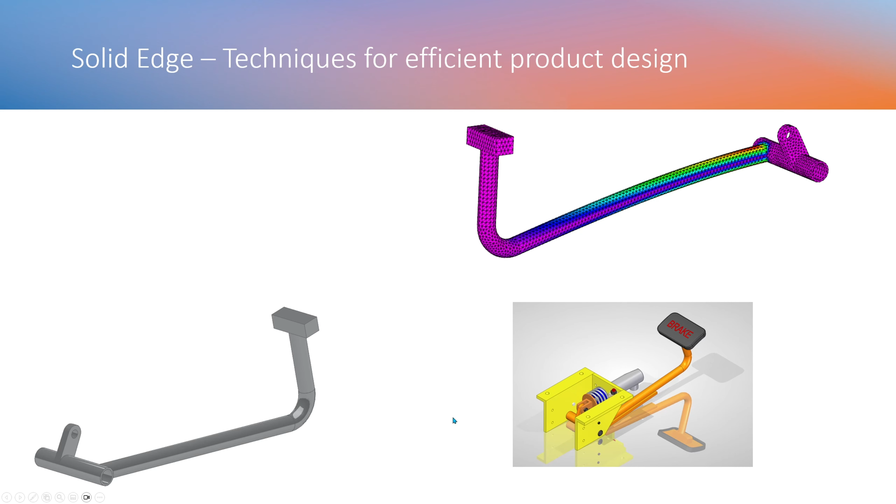So here, what we are going to do is we are going to design a brake pedal within the existing assembly. Then we are going to ensure the fit around all the existing components in the assembly, and then we are going to ensure that the component that we made has all the assembly relationships, and then we are going to test the existing pedal to make sure it has sufficient strength.

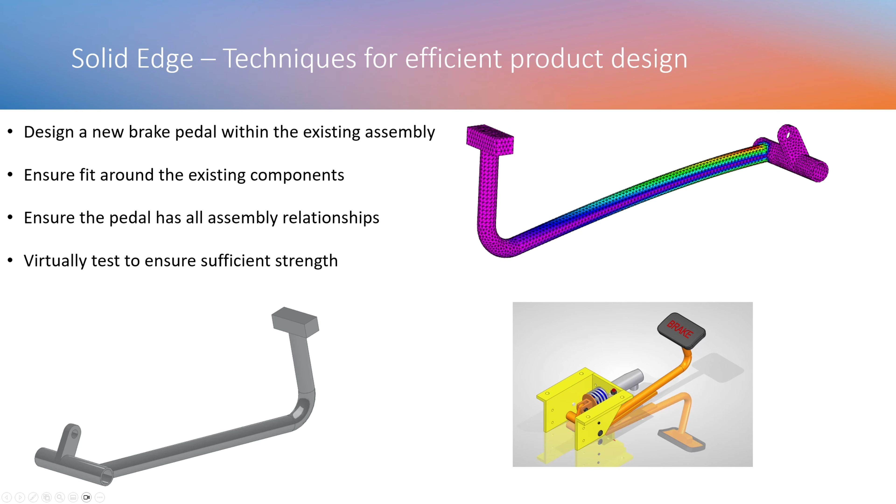So here we have a brake pedal assembly, and we'll see how we can create the pedal part inside the assembly itself using the create part in place option. So inside Solid Edge you have the option to create part in place directly, where you can place a coordinate system and decide if you want to edit the part right in the assembly.

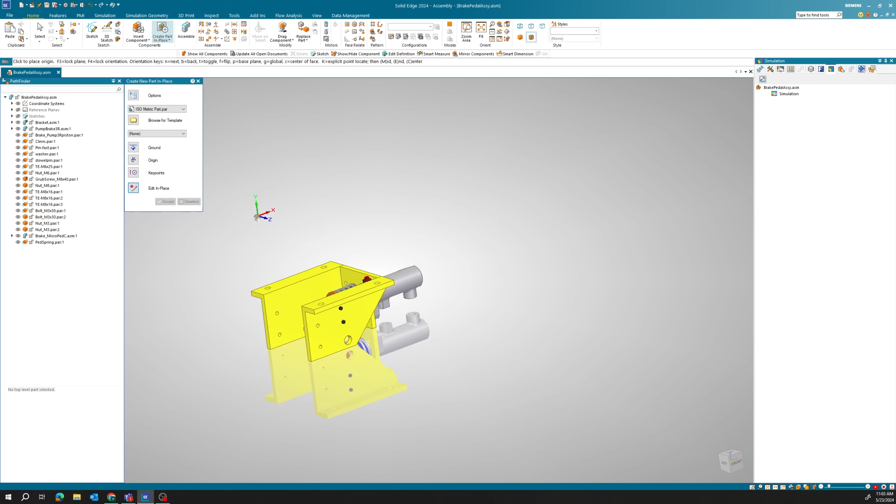So once you make the selection for those options, the software will give you the option to place your origin, and then you can decide what standards you want. So I'm going to use an ISO metric part file, but you also have options for sheet metal, assembly and weldments. You have the option to ground the component, and this one is to make sure that you are going to edit the part in place.

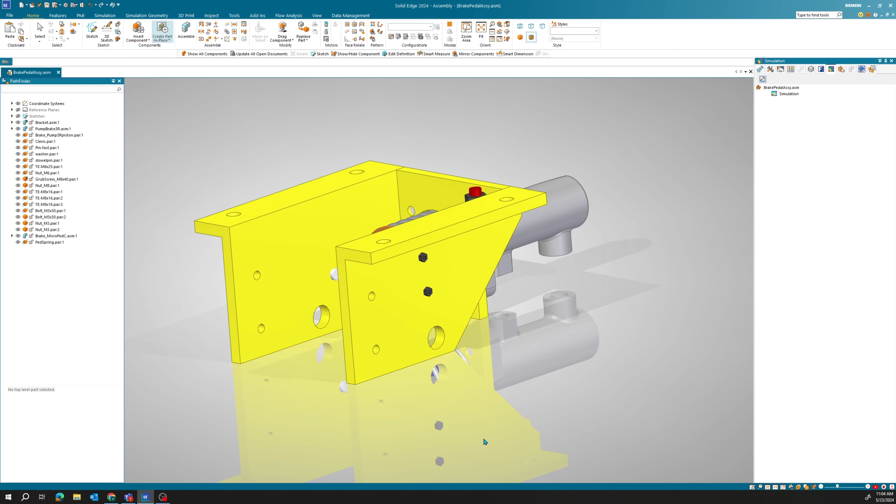Once you hit accept, the software will ask you to save the part. So I'll just give it a name, pedal 5, and this puts you right into the part environment, as you can see.

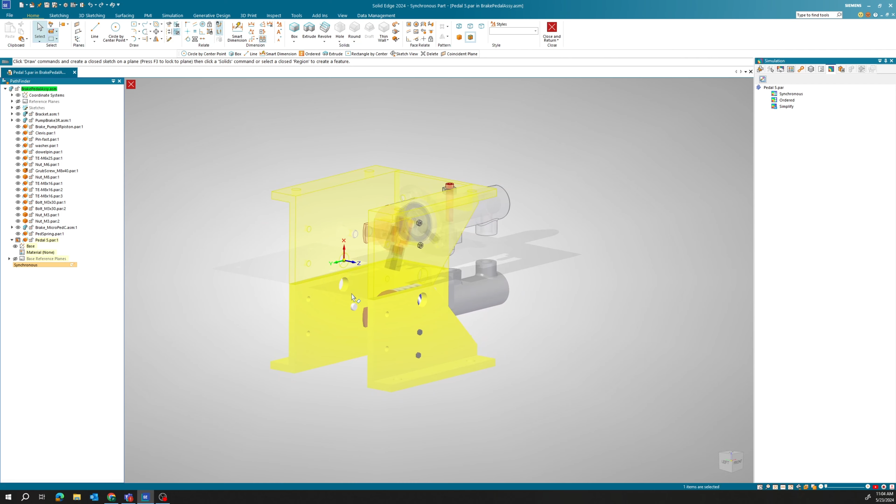So even though I have selected edit part in place, you'll see that my assembly is hidden, which will normally happen. So you can turn the assembly back on using the option that is called hide previous level, and the shortcut for that is Control plus Q. So here you'll see the assembly in shaded. Now what I can do is I can use this existing coordinate system and start my first sketch.

So here I would like to make two concentric circles and give them the dimension. So the first one I'm going to give a dimension, let's say 21 mm, and the second one I'm going to give it a dimension of 17 mm.

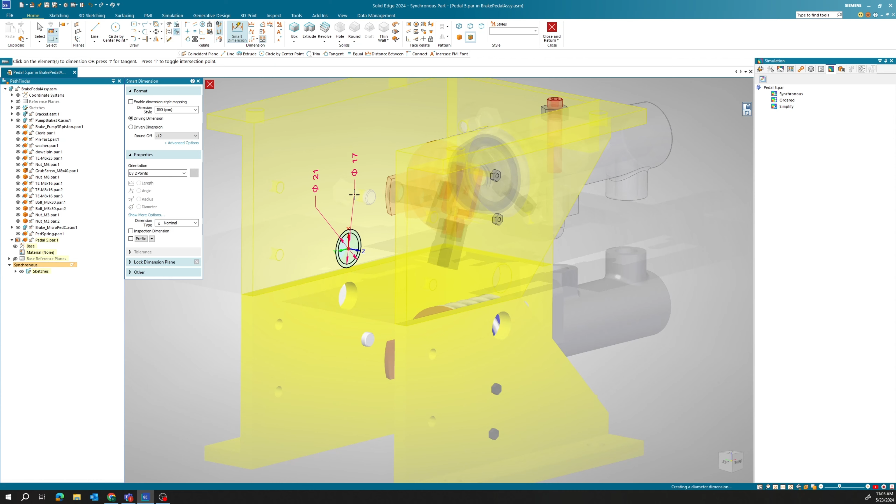Now since we are doing this in synchronous, the user can quickly select the region itself and extrude it out. Now when you're extruding out, you don't have to specify the distance, because since you're in the assembly environment, you can use the existing edges and endpoints as a reference to make the solid. So here you can see quite easily I have made my first solid.

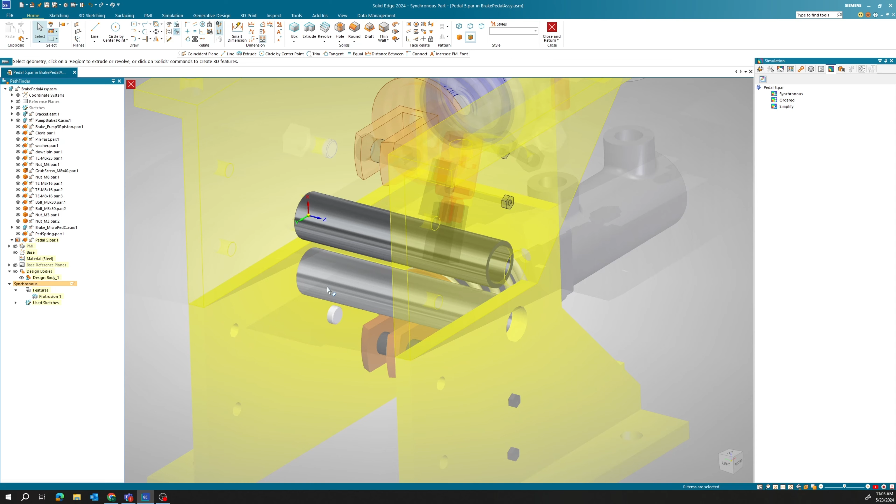Something that I did not discuss is that you can also assign material for the part. So you can quickly go to the material table here and select the desired material. So here I plan to use steel for my pedal part.

Next is where I'm going to attach a pivot here. So to do that, I would need a plane on which I need to make a sketch. So since we are in synchronous, we can simply select any face, and then using the steering wheel, I can decide exactly where I want to place that plane. So let's say I want to place this plane at a distance of 33 mm

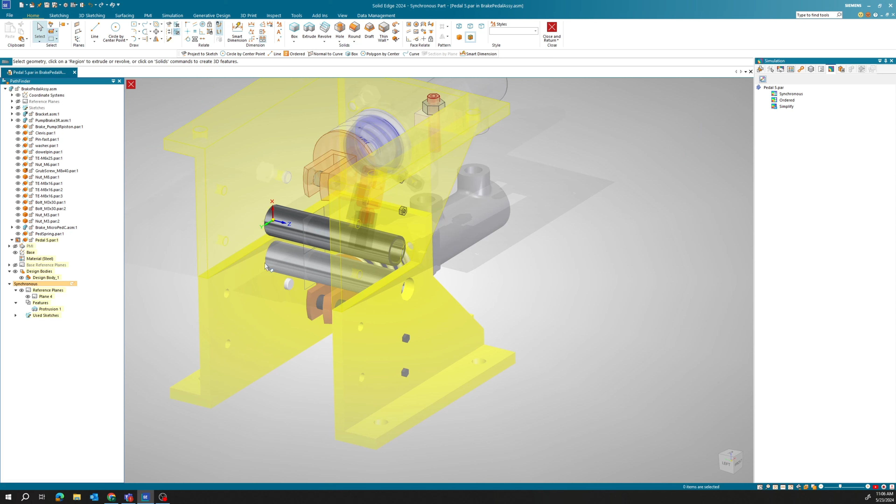from the base reference plane for this part, and then I don't have to use this part, because now if I want to make a sketch here, you'll see that I'm not able to select anything right here. So for reference, I'm not able to select anything here, as you can see.

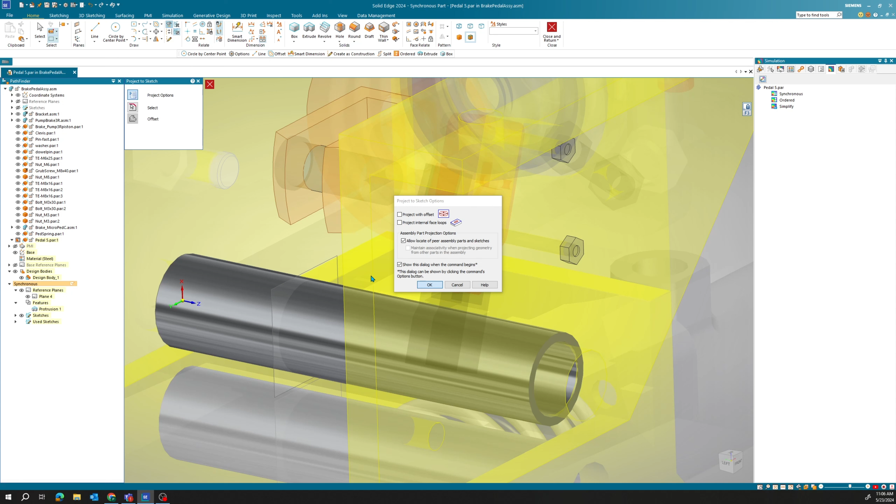But to make a sketch, we have a command that is called project to sketch, and use the existing edges to make the sketch. So here I want to select this circle right here for reference, and this circle right here for reference. So this quickly creates these two circles as a start point, and using these sketches the user can very easily make the other sketches too.

Now I can place a dimension here. Let's give this a dimension of 20 mm, and to make that pivot I would like to place two tangent lines from this circle right here to this circle right here. Same I would like to do here as well. Place a tangent line from here to here.

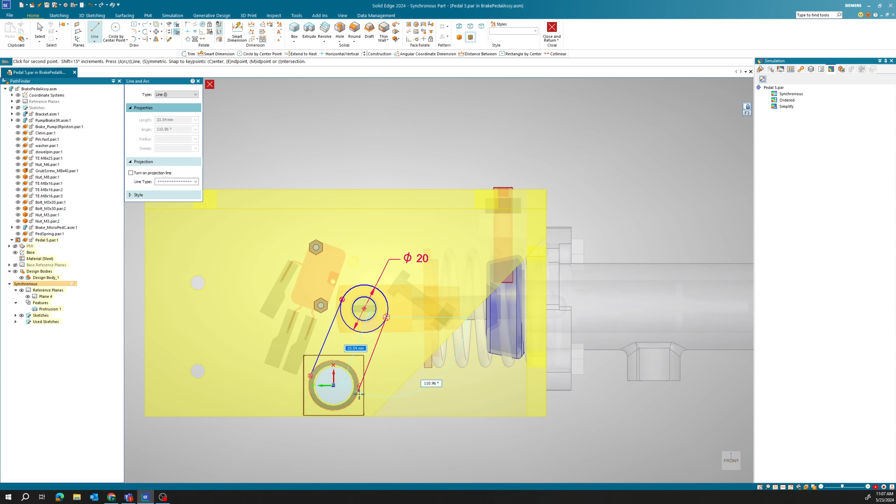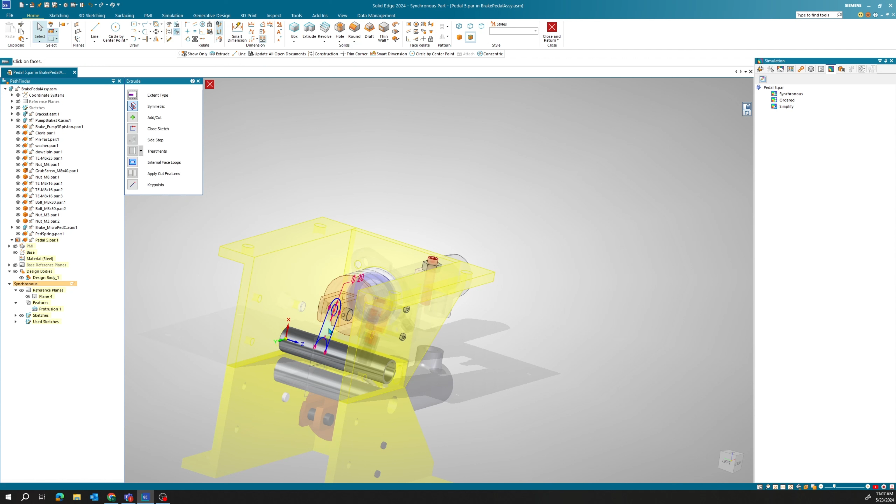And now to make it a complete solid, I'll be using a trim command and trim off this extension so that the software identifies that as a solid region. And like I said, since you're in synchronous, you can quickly select the region and create a solid. So here I'm going to turn on my symmetric extend so that it extends on both the sides and give it a dimension, let's say 8.

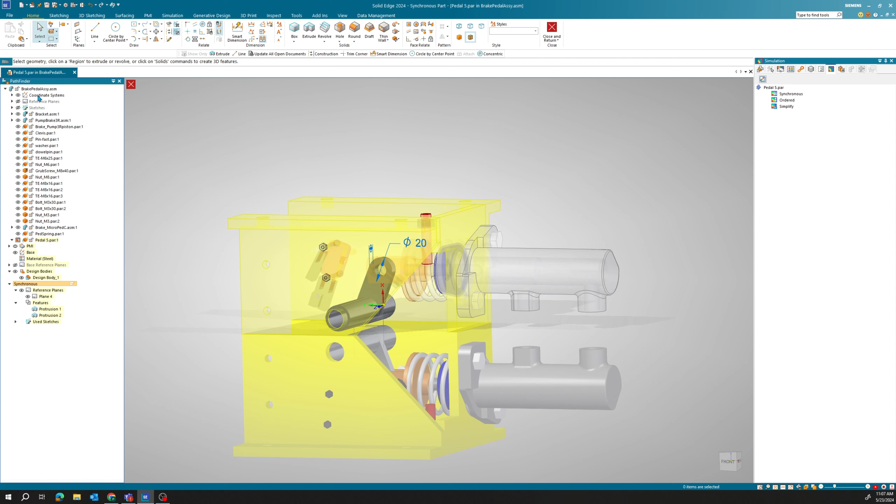So here, as you can see, if you take a look from the left view, it is placed exactly at the center as it is supposed to be. And this is how you can make a solid or a part using the assembly itself. Now to create the rest of the part, I don't need the assembly. So to make my space less cluttered, I'll just go ahead and say show only to the part so that I can focus only on the part, right? So let me hide these dimensions.

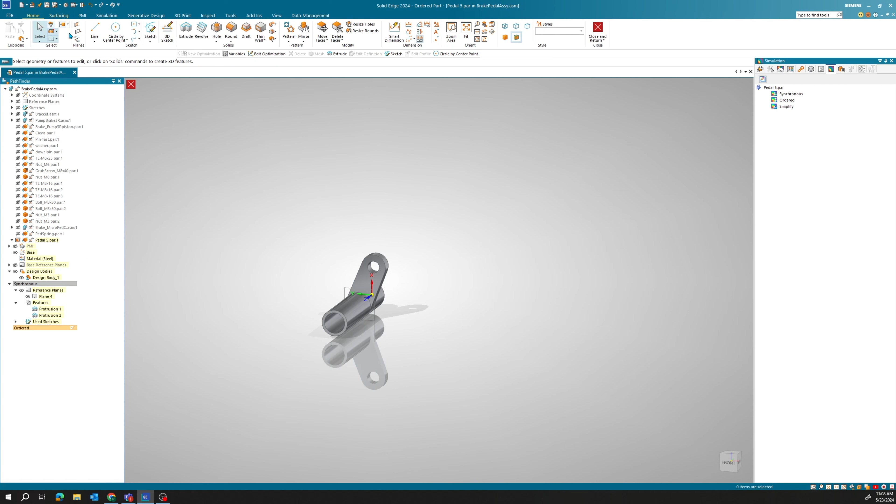And now to make the actual pedal profile, I will need one more plane. Now that we have done some modeling in synchronous, we'll now move to ordered. And in ordered, we'll create a parallel plane. Now this parallel plane will be used as a start point to create the profile of the pedal.

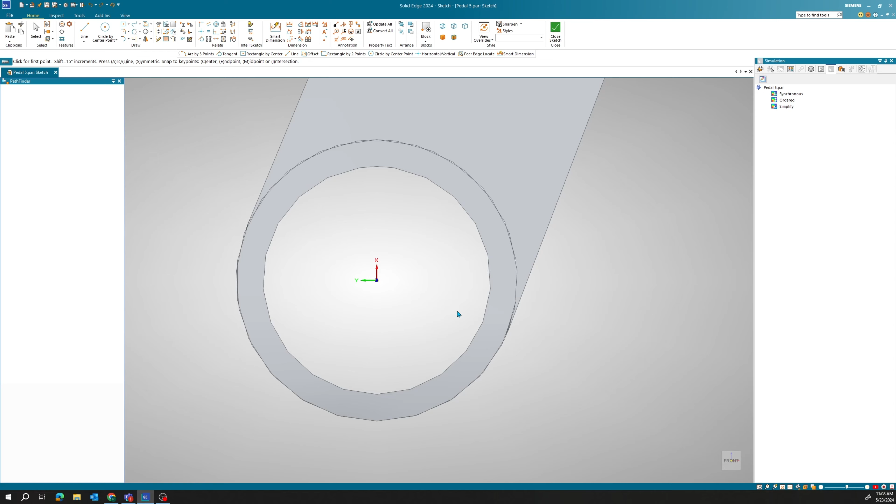So to create a profile, I'll go to line command and select the plane which I just made right now, on which I'll be making the profile. So this profile is what is going to decide how your pedal is going to be. So let's make the first straight line, make an arc here, and then another straight line.

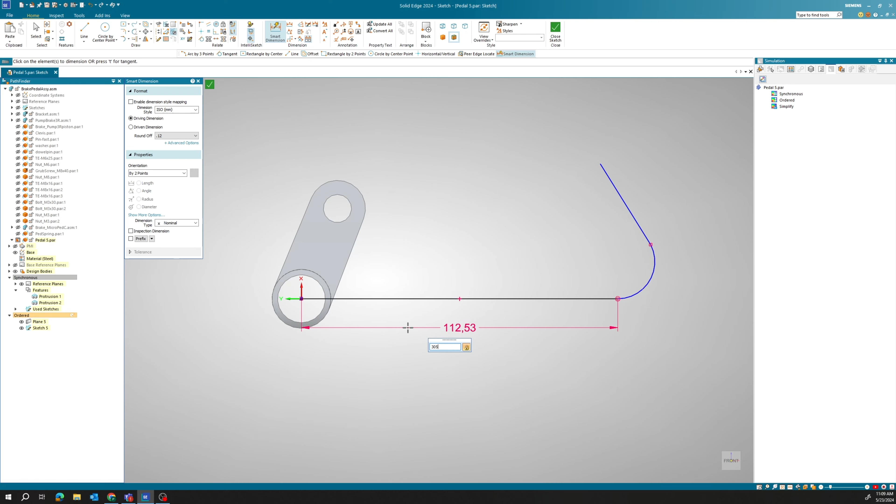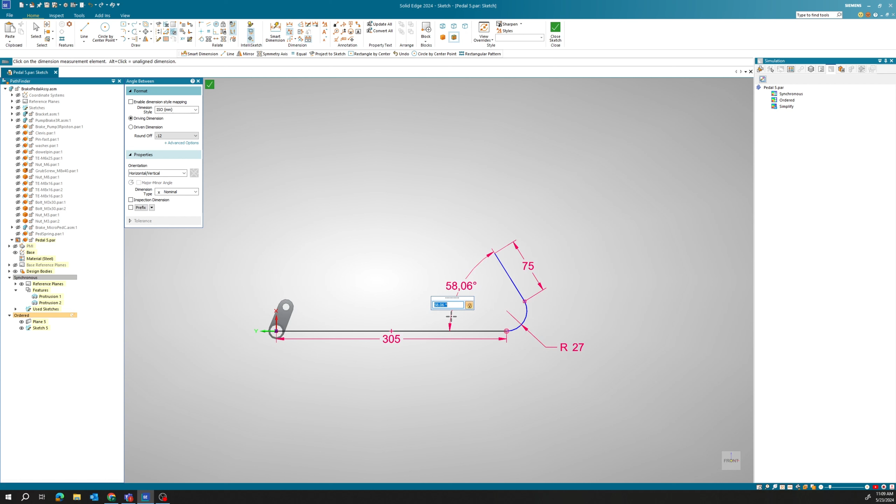So I want my pedal to look something like this, and using smart dimension, I can place all the dimensions here. So let's do 305 mm as the total length. Radius of this one is going to be 27, and this length is going to be 75. Now I also want to specify the angle between the inclined line and the straight line here, that is going to be 75 again.

Now one thing that you might have noticed is that one of my sketch is black and one is blue, which means that the blue part is not fully constrained. And the reason why it's not fully constrained is because the line here does not have any relationship with the arc. So we need to place a tangent relationship between them. And once you do that, you'll see that the line here turns black, which means it is fully constrained.

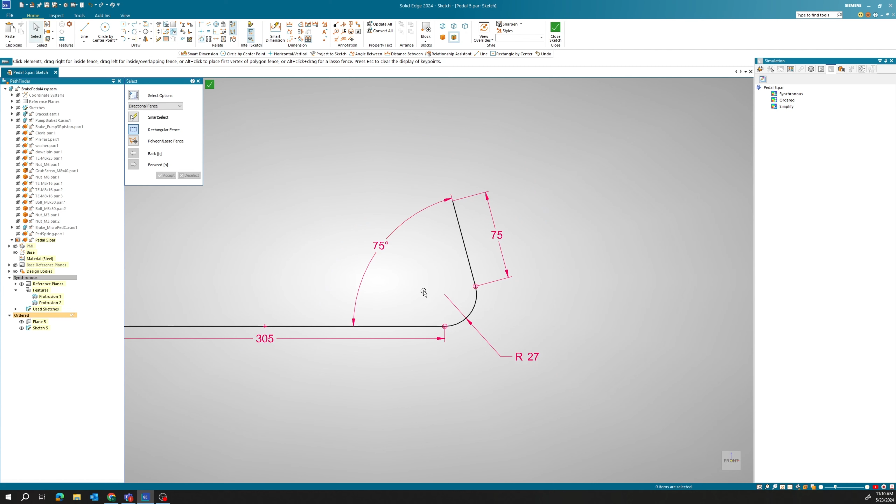So once you finish creating the profile, we need to create the cross section for the pedal too. To do that, we'll have to place a plane that is normal to this curve of the pedal. To do that, I'll go back to plane creation and select a plane that is normal to the curve. And on this plane, we plan to make a circular profile. So to make that, I can go to circle and quickly create a circular profile.

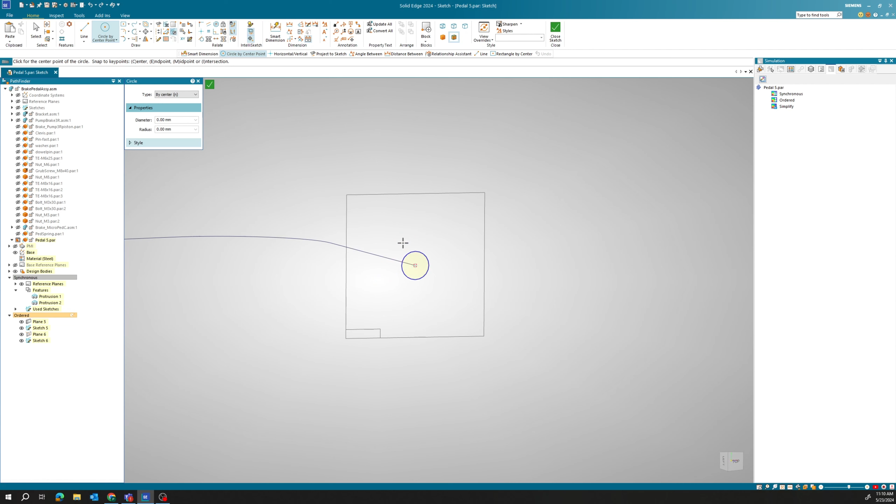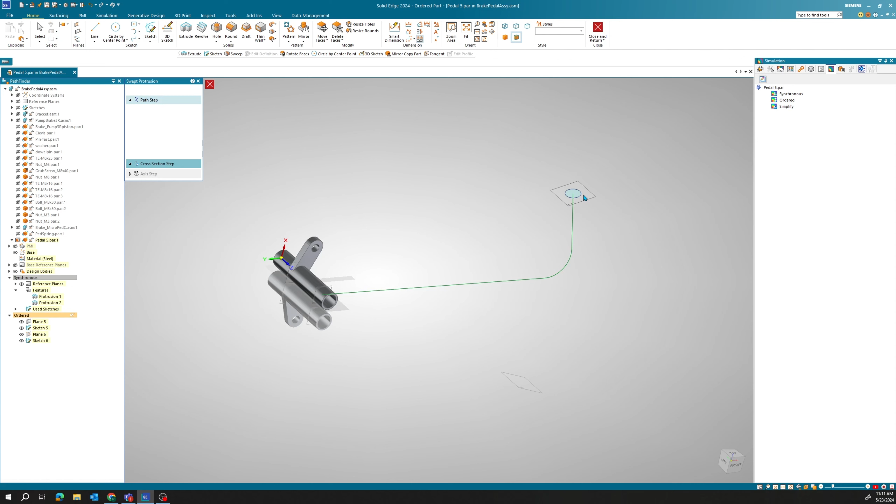So here what I'm going to do is I'll place a dimension. Let's say the diameter of the circle is going to be 18 mm. And now using the sweep command, I can sweep this cross section over this path. So we'll go to sweep command, select the path, and then the cross section. And it creates your pedal something like this.

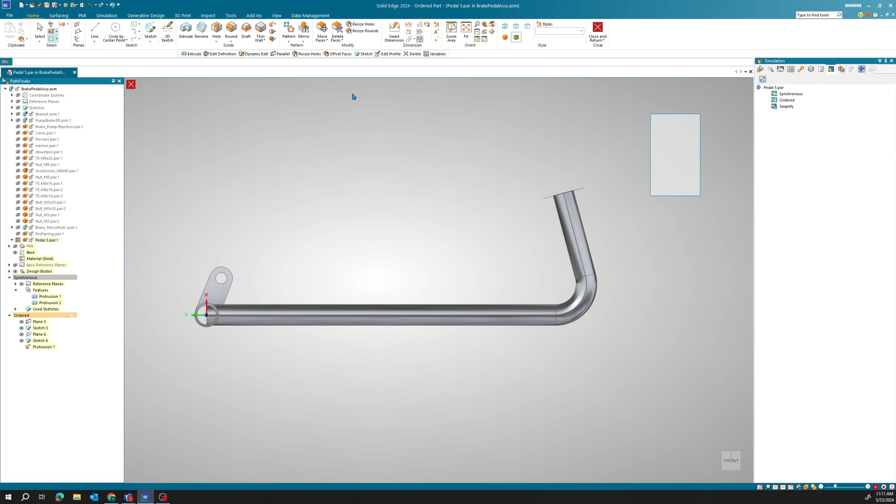Now, a really good thing about ordered, or something new that has been added in ordered, is that we have access to synchronous technology inside ordered. So some commands like move faces, offset faces, and rotate faces, we get access to synchronous environment, right? So we can quickly select the regions that we want to rotate. So here I want to rotate these regions, but accidentally I selected these faces too, so I can simply turn them off.

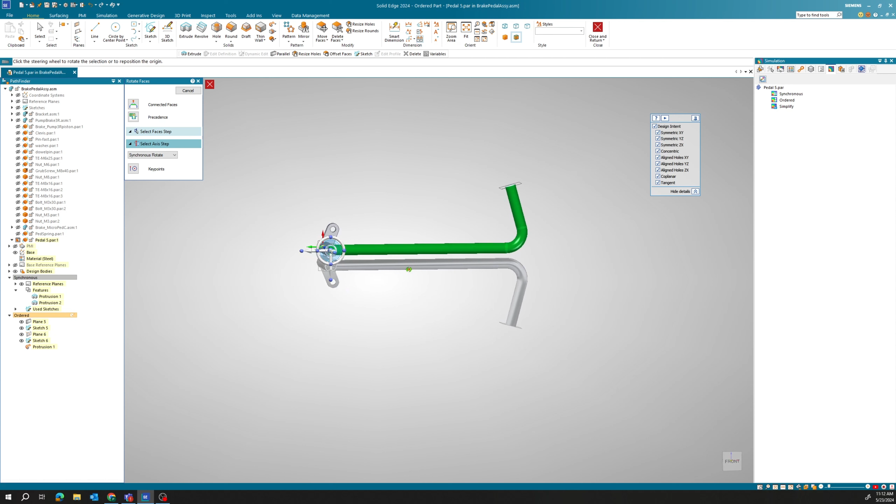And once I hit this green checkbox, you'll see that I get access to steering wheel even though I'm in ordered. So this is something new that has been introduced in the newer version of Solid Edge, so that the users can get access to both the environments at the same time. And using the steering wheel, I can change the angle here.

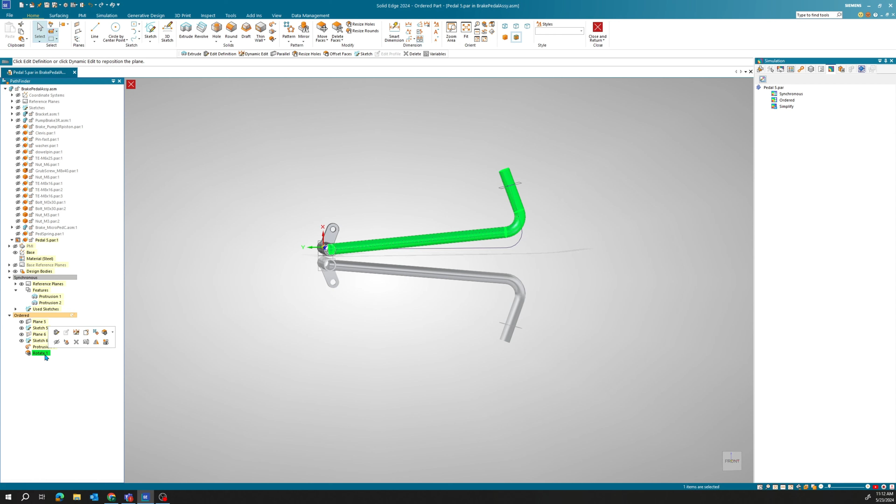So let's say I want to place the angle to 5 degrees here, so that the actual pedal can be depressed. And since we are making this change in ordered, it always creates a history here, as you can see. And if the user wants to change the angle again in the future, they can come here and change the angle, right? So once we have made that, we'll create a footrest for the pedal too, and that can be easily done using this extrude command.

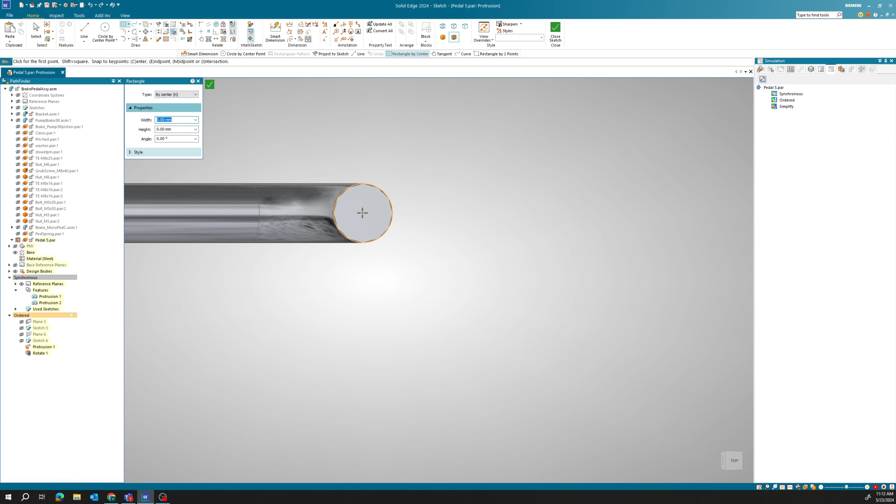So here I'm going to create a rectangle by center first, and then place a dimension. Let's do 20 by 50 here. So we'll do 20 by 50, and very quickly we'll make a solid out of it. Since we are already in the extrude command, we can make a solid right here. So something like this, we have created our pedal.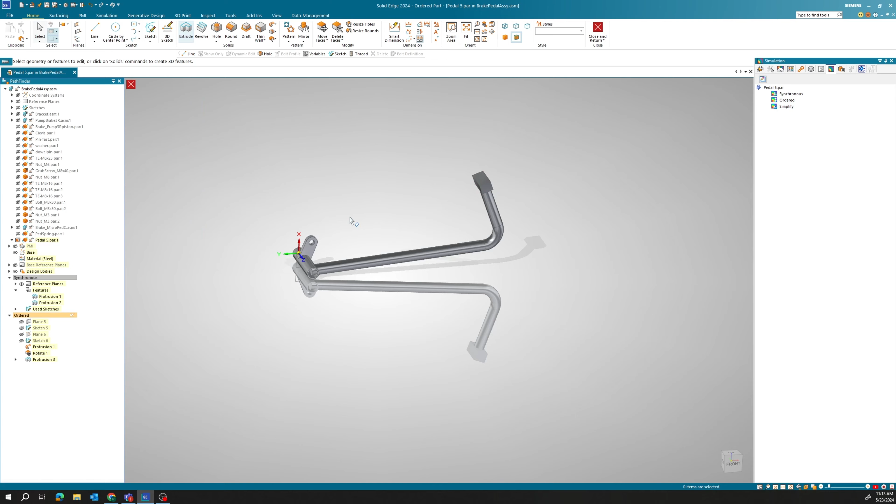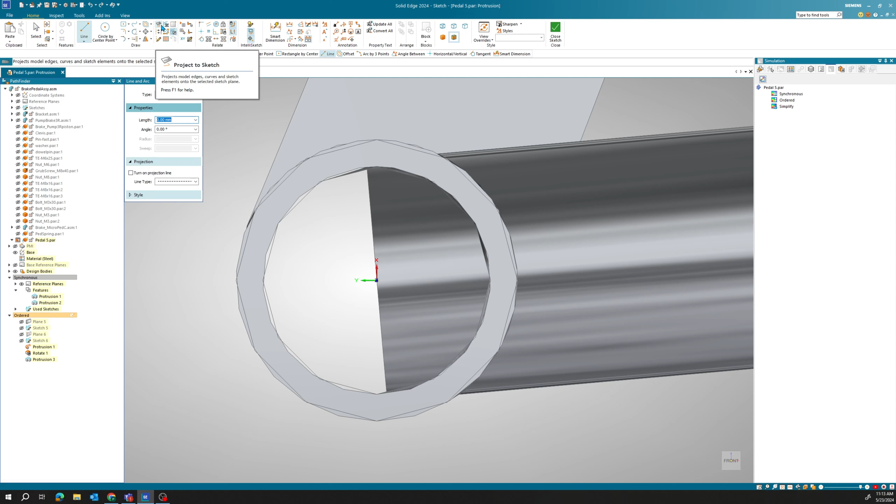There's a small defect that the pedal cross section here is intersecting with the pivot. So what we can do is we can come back to the extrude command and quickly trim this out. So to do that, I'll select this coincident plane and use the existing edge using the project to sketch command and trim off that intersection. And that way, once I trim that off, you'll get a really nice cut, as you can see here.

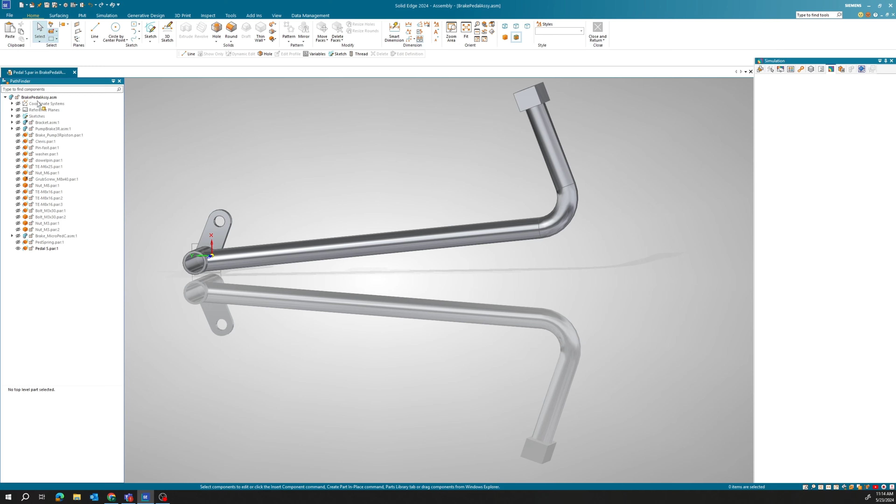So you see that within no time, I have created a pedal profile or a pedal part inside the main assembly. And if I go ahead and close this and turn on my actual assembly, it should look something like this. Now this is not a complete assembly, so we are still going to need some additional parts to be connected here. So I'll go to my parts library and bring in the required parts.

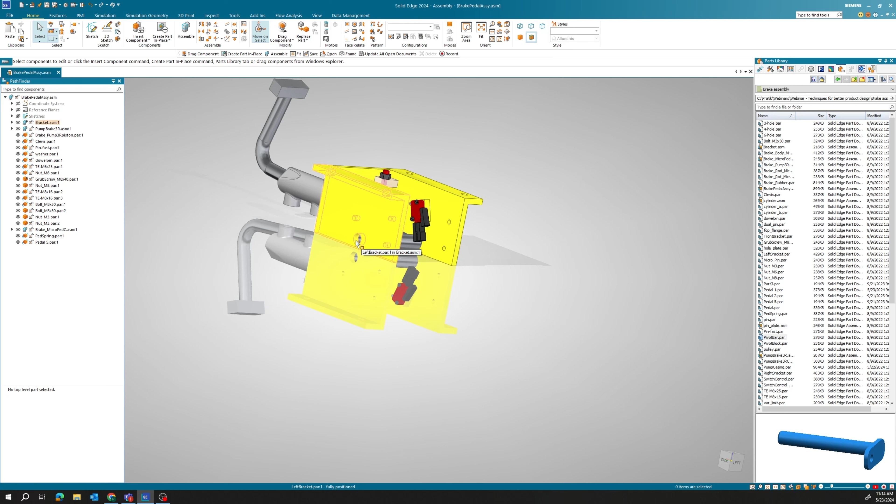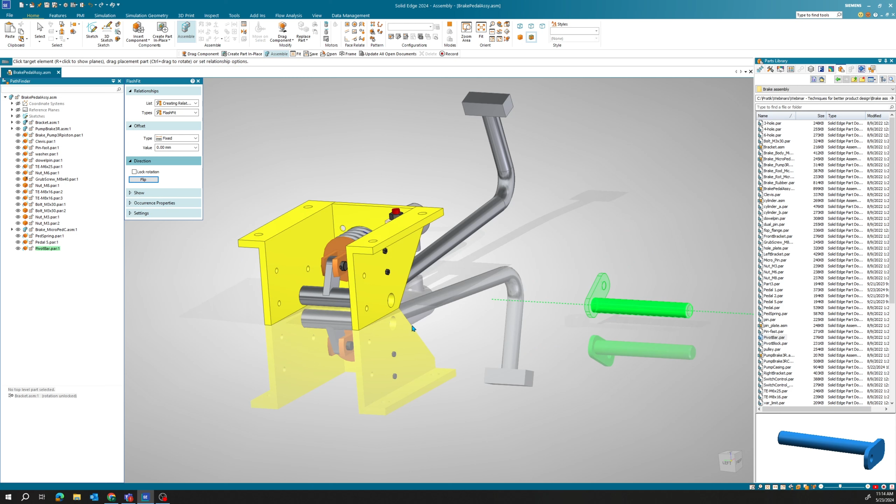So here I'm going to add a pivot here which will go inside this pedal. So let me bring the part in, and very quickly inside Solid Edge I can place all the parts. So using FlashFit, I'll just select this part right here, and it will axial align with this one. Flip the sides, we'll create one more axial align here, and then finally face mate these two faces.

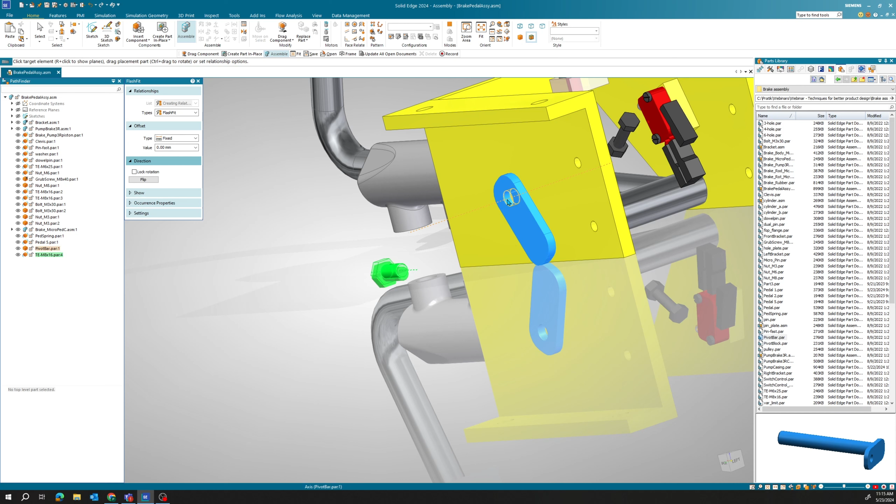Now to attach this pivot bar, we'll need an M8 bolt. So we can bring that in from the Pathfinder itself, since that bolt has already been used here. So FlashFit these two faces. This needs to be flipped, and then we'll create a face mate between this part of the bolt and this face of the pivot bar. So now everything looks good.

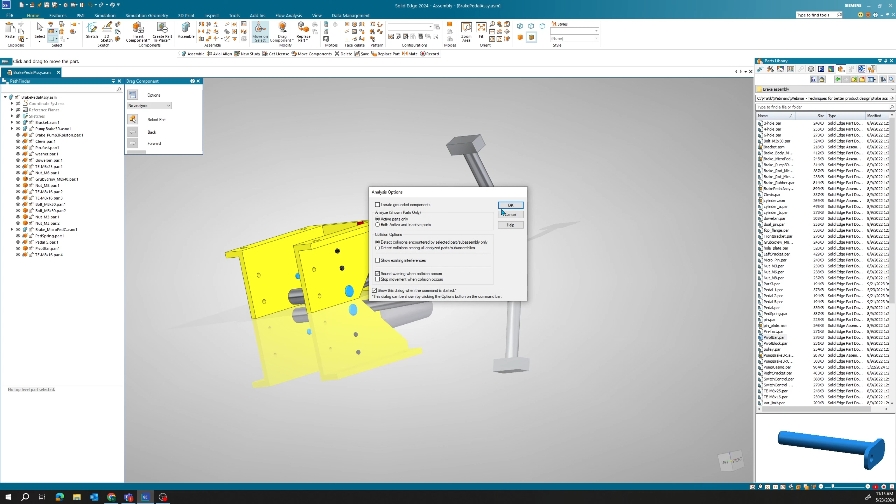Now let's try to simulate the motion of this pedal here. So to do that, we have this drag component command, using which we can just try to drag the component. So looks like not all the parts have been fully constrained. So we need to apply constraint. Even though we have designed the part itself in the assembly environment, we still need to constrain it.

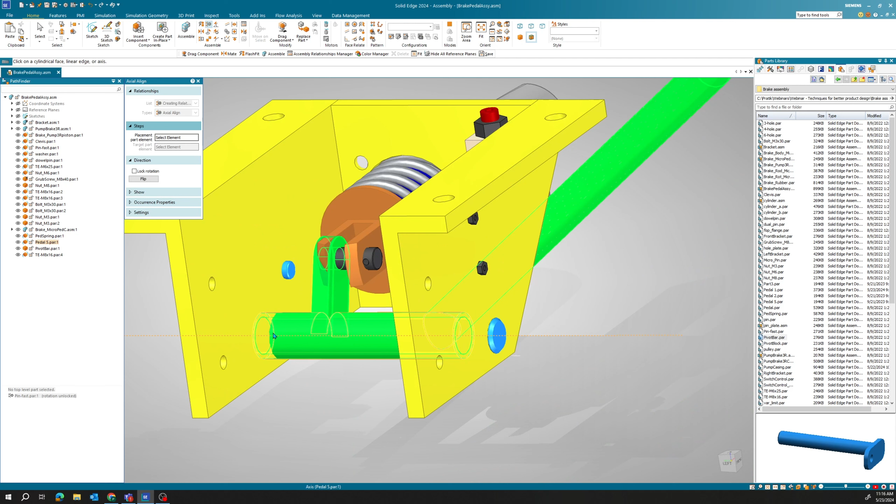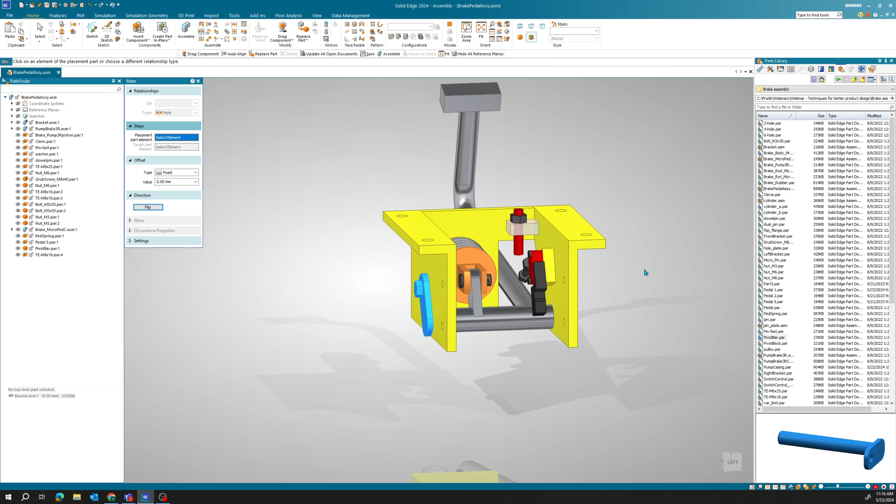To constrain the part, we can use some commands like axial align this circular cutout with this circular cross section. Then we'll need to axial align these two holes, and we need to create a face mate between this face right here and this face right here. So now the part is fully constrained, and now if we try to move the pedal, it should simulate exactly the way we want.

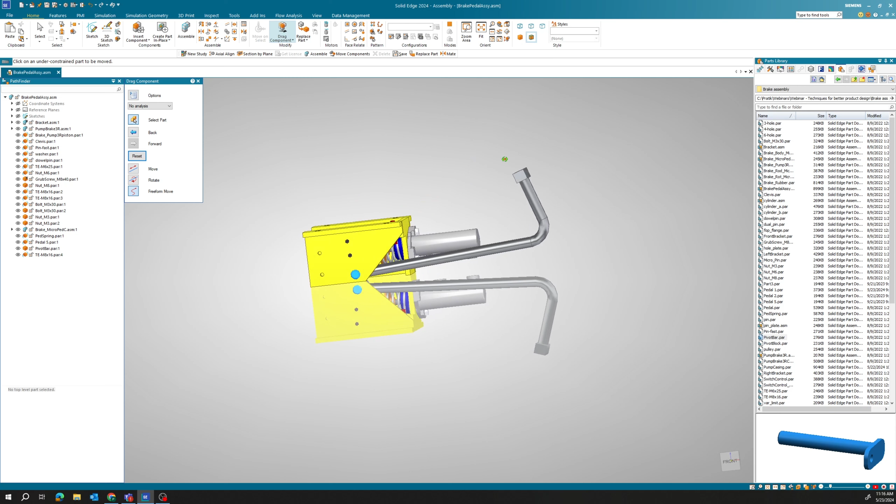And as you can see, the part is following the profile or the way we have designed it to be moving. So this is how you can create your parts quickly inside the assembly itself, which will save you a lot of time going back and forth, taking the measurements and creating the part inside a simple part environment. Now this is not the end. We still need to check for the structural integrity of the part that we have made.

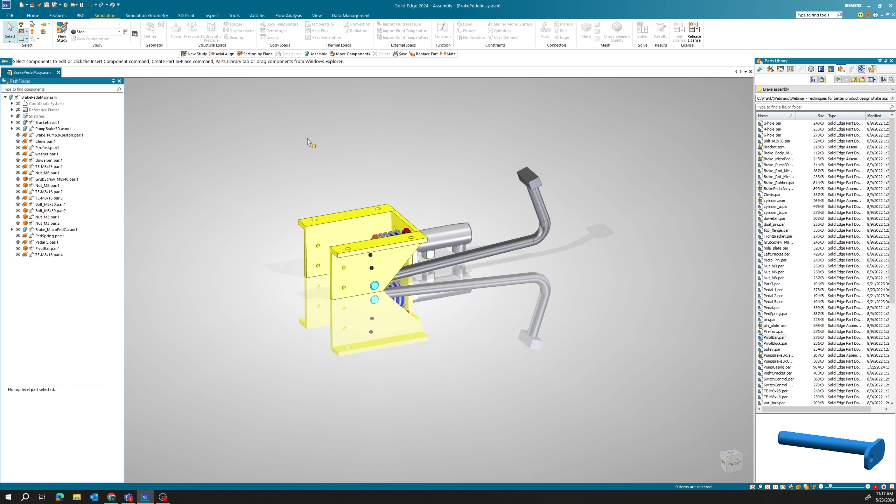Now one thing you have to remember is that Solid Edge is not just a typical design tool. We also have add-on products like simulation. So a really good thing about Solid Edge Simulation is that it is integrated right here inside the Solid Edge environment, so that you get the same look and feel inside Solid Edge. So to use that, I'm going to open this pedal part in a new window. And now I'll go to the simulation tab.

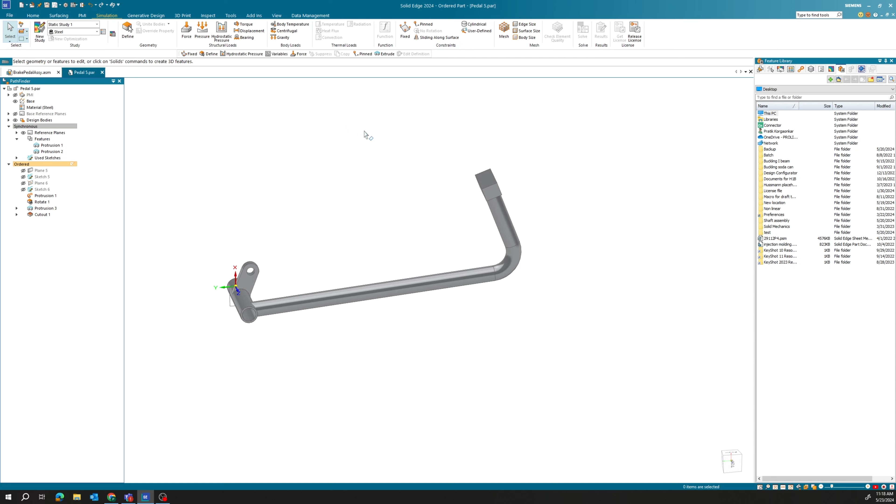Now let's start by creating a new study. We are doing a simple linear static study, and here I will be using a pin constraint for this cylindrical motion, and applying a force on this pedal right here, and the force value, let's say, 1,000 Newton.

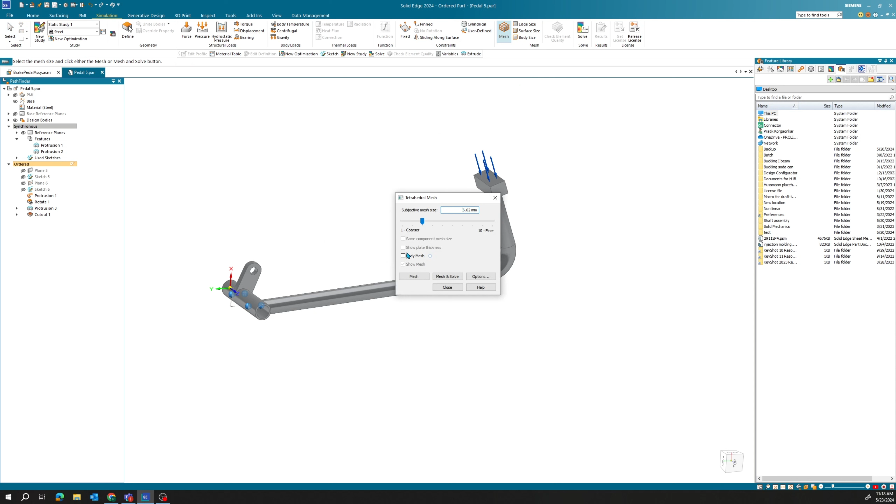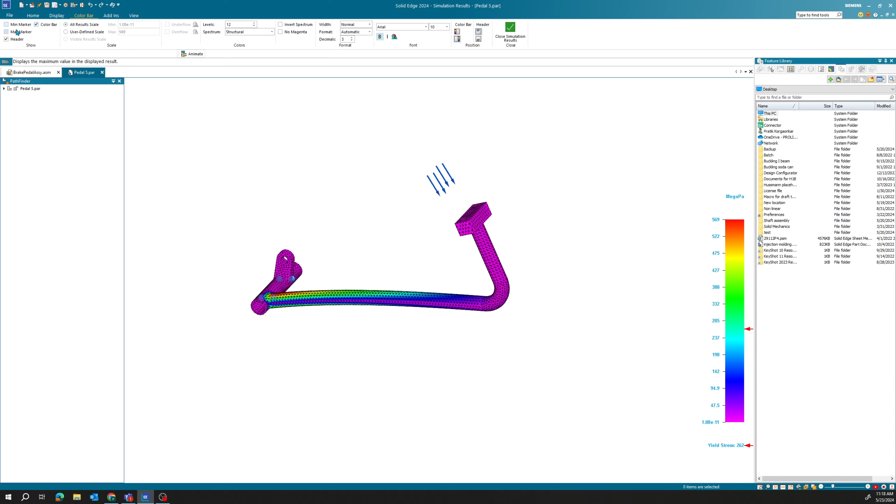Once you have specified the loads and the boundary condition, you can mesh and solve the model quickly from the mesh command itself. So once the model has been solved, you'll find out the high stress concentration areas, and then you can alter your model according to that. Now you'll see that my high stress concentration area is going to be right here. The maximum stress, as you can see, is 569 megapascal, and my yield stress is 262 megapascal.

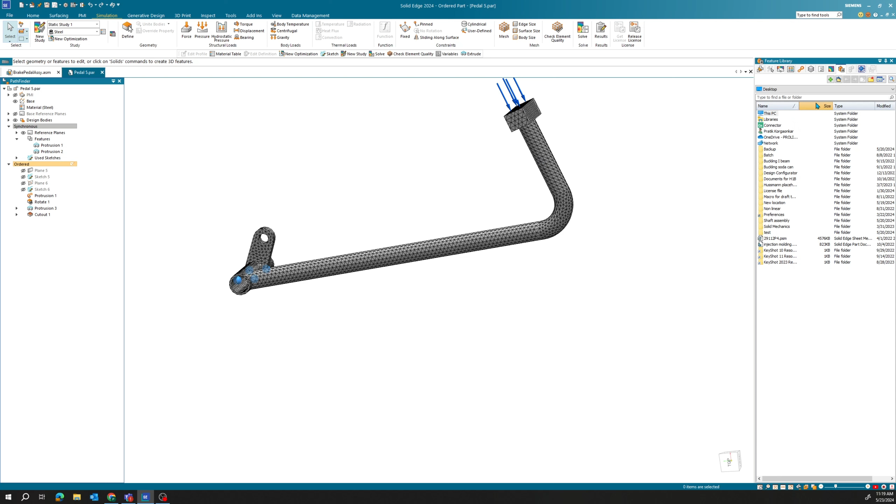So in order to reduce the stress, one thing that we can do is we can increase the diameter of this pedal profile, right? So to do that, since we are already in Solid Edge, you don't have to do a lot. Simply, just for convenience's sake, I'm going to hide all these loads, boundary conditions, and mesh that we have made. And using the sketch right here in the same environment, I can very easily make the change. So here, instead of 18, let's change that to 21.

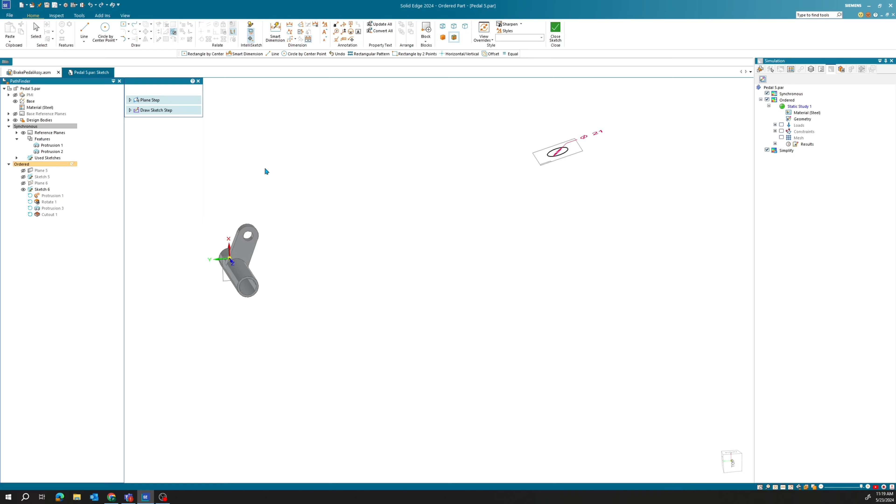And once you close the sketch, the software will update your profile for the new cross section. Now, a really good thing about this is you don't have to reapply loads and constraints. All you need to do is remesh the model. And just by hitting mesh and solve, the software is going to solve for the new cross section, and we should definitely see some reductions in the high stress concentrations.

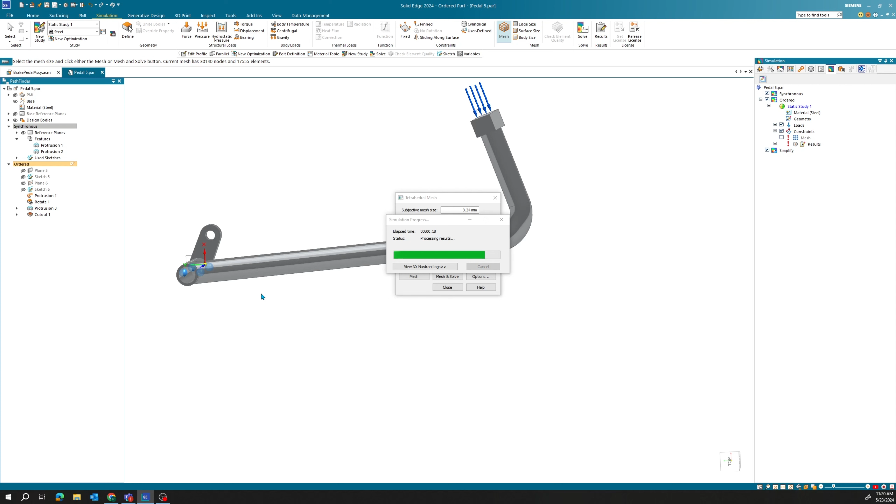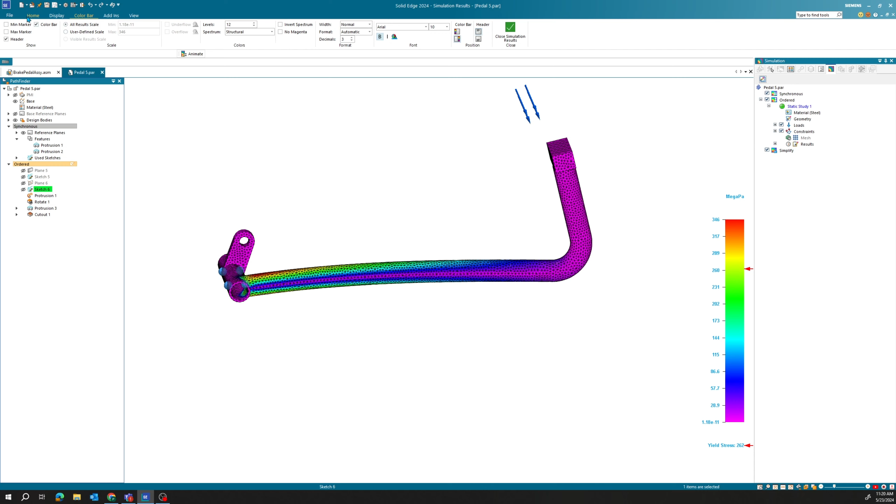Now, as you can see, our stress concentrations now have been reduced to 346 megapascal, and previously it was 569 megapascal. So this is one way of very efficiently reducing the high stress concentration areas. Also, inside Solid Edge simulation, you can animate to see how the pedal is going to behave when actually depressed.

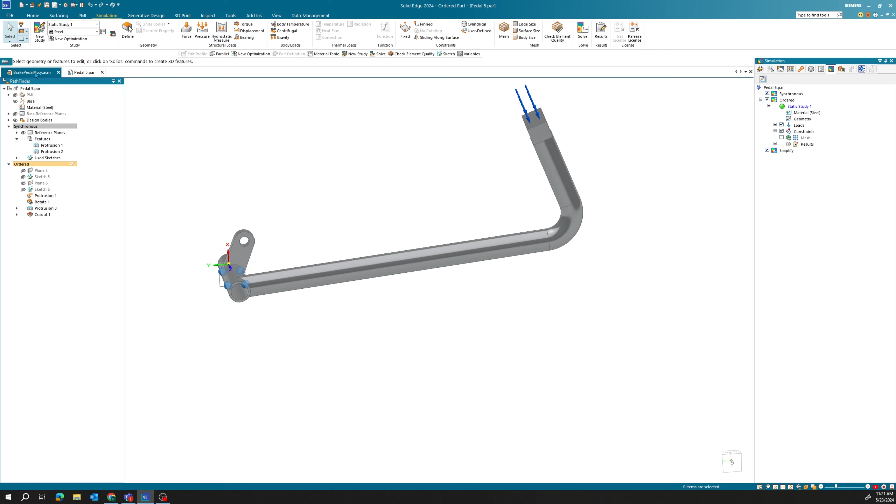So this is how a user can utilize Solid Edge to its full extent by not only designing inside Solid Edge, but also performing simulations and other operations, like, for example, if you are someone who wants to do a motion study. To do that, we have a dedicated motion analysis environment where we can actually simulate the motion of this entire assembly, and it looks something like this. So it is always a best practice to use all of these tools to their full extent, to get the best out of the software.

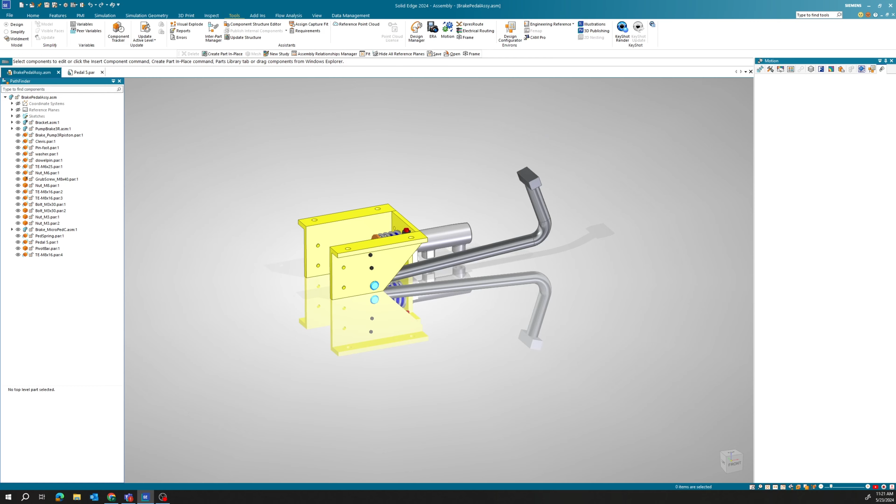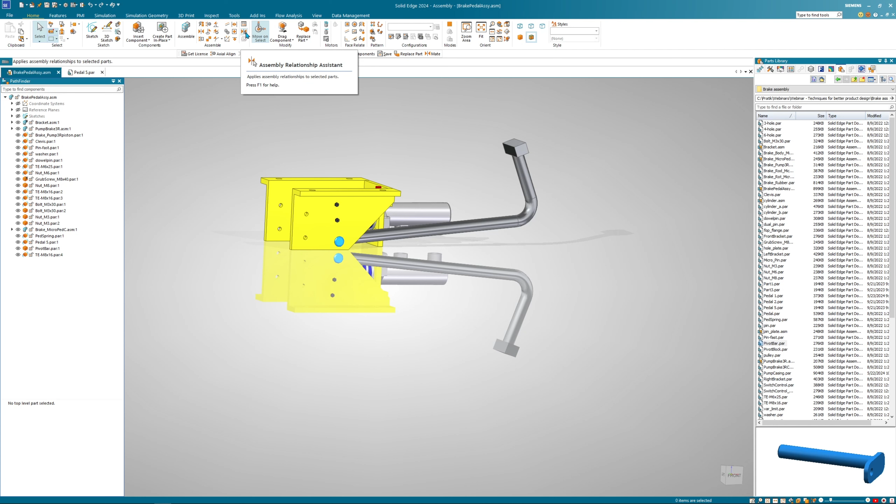So something else that I would like to cover is that you don't have to manually place the relationships for the part you just created. Solid Edge has a function called the assembly relationship assistant, which will help you to place the relationships automatically. So let's take a look at how it works. So here is the assembly relationship assistant command. First, let's go ahead and remove the existing relationships. So we'll just say remove all these relationships. And now to place all these relationships back, you can use this assistant.

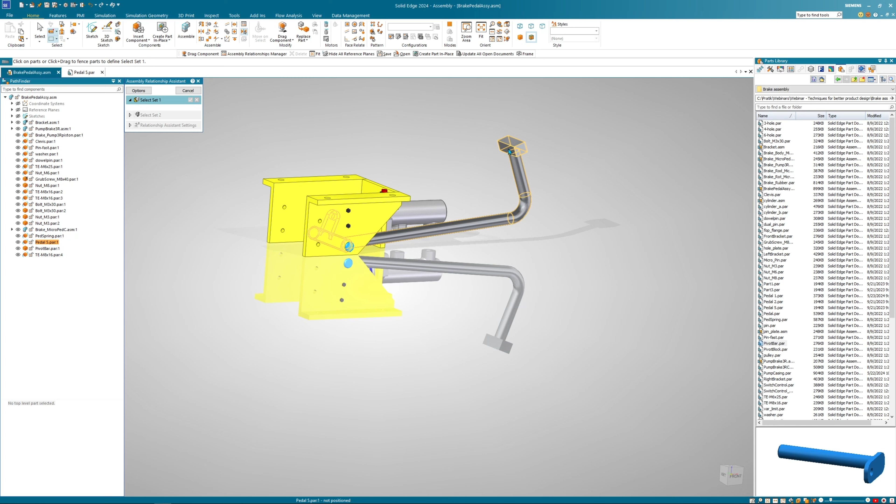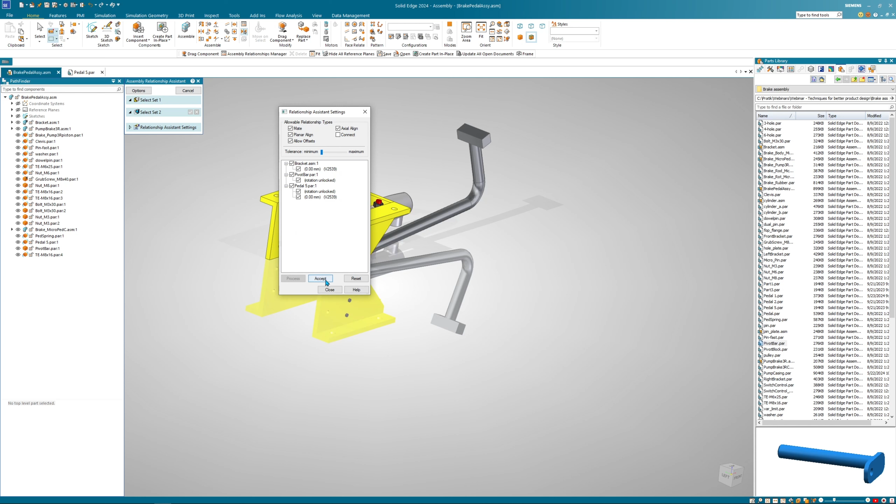Here it is asking to select set one and set two. So this is going to be my first set. And the second set is with respect to which other components you want to place a relationship. So here it is going to be this part here and the second part, and also I would like to add the pivot part here. So once I hit the green checkbox, you'll see this window show up. Make sure that we have this selected, and once you hit process, the software creates all those relationships for you, and once you hit accept, those relationships are applied.

So now if I go back to my pedal 5, you'll see that those relationships are now applied. And if I were to drag the component like I did previously, you'll see that it moves and behaves exactly the way we tried before. So this is again going to help you to remove some manual work and automate the process of creating the relationships.

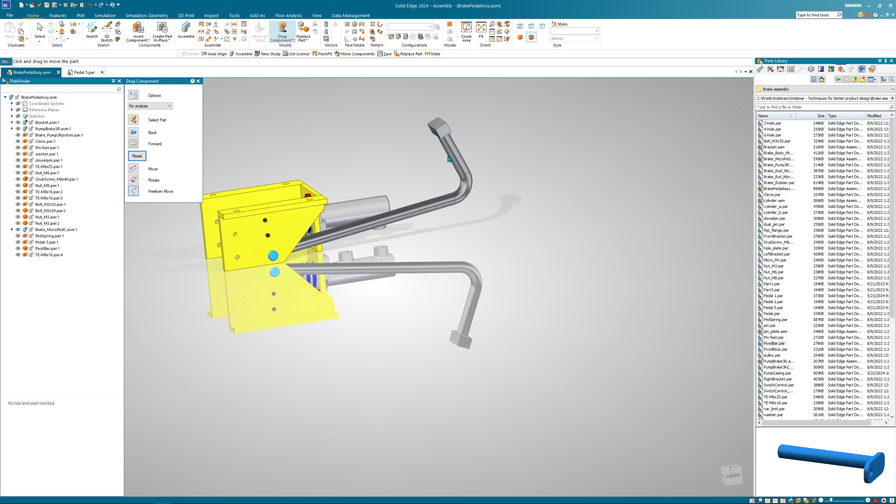So to summarize what we learned today in the webinar: number one, how we can use the existing geometry to make the components quicker to ensure the fit. Number two, how we can easily modify the existing features using synchronous technology, and the new synchronous technology in the ordered environment. How we can utilize the inbuilt Solid Edge simulation to check the structural integrity of the model. How we can take advantage of the single integrated environment for greater flexibility to modify the model or do other operations, and how we can automatically capture the assembly relationships to eliminate a lot of tedious work.